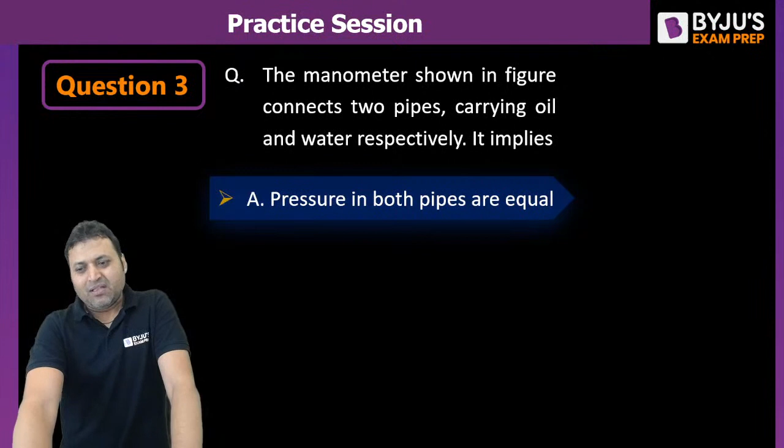Let us move to question number 3. The question is from the manometer. The manometer shown in figure connects two pipes carrying oil and water respectively. It implies: pressure in both pipes are equal, pressure in oil pipe is higher, pressure in water pipe is higher, or insufficient data. There are two pipes, one carrying oil and another carrying water. The figure is on the right hand side of the screen.

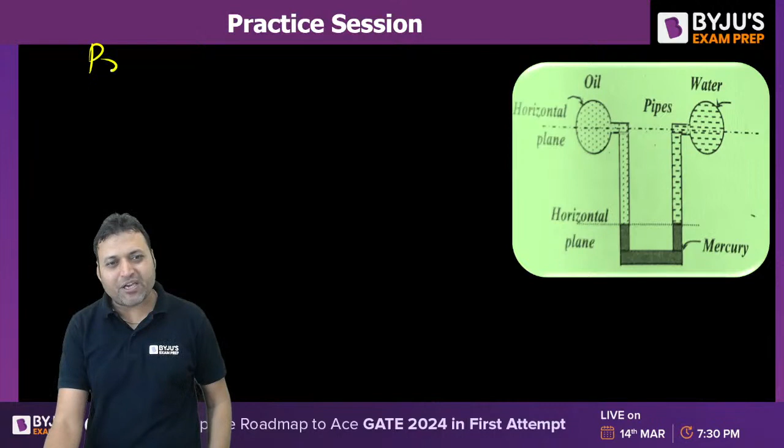What is the problem with manometry? The question looks very simple. We develop confidence, even overconfidence, to attempt questions from manometry. But if your basic concepts are not clear, you might end up with the incorrect answer. Let us write the pressure equation using Pascal's law and the hydrostatic law. Let me call the pressure in the oil pipeline PO, and the pressure in the water pipeline PW.

So if we write the pressure equation starting from PO, this is the datum line. I am using the datum line method. So PO, this point will also be having pressure PO. We are moving in downward direction, plus density of oil into G. Let me assume this height as capital H.

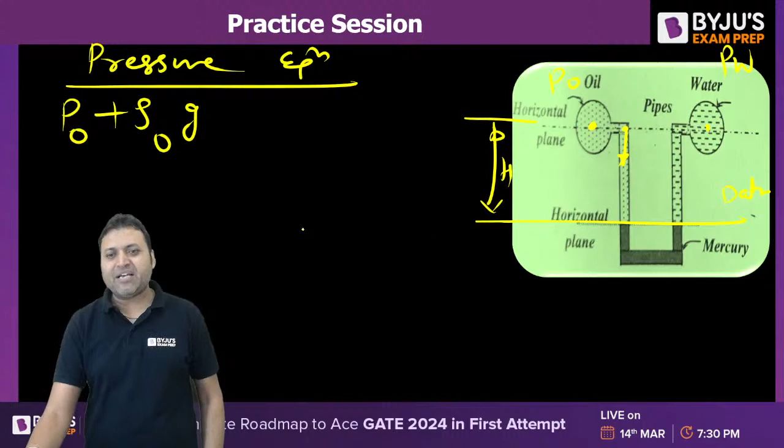This is Px, the pressure at point X, is equal to, starting from the water pipeline, pressure in water pipeline is Pw. We are traveling in downward direction, so pressure increases with depth. Now we are traveling in water pipeline, rho W into G into H. This is Py. Px is equal to Py, isn't it? So we can write PO minus PW is equal to rho W minus rho of oil into G into H, isn't it?

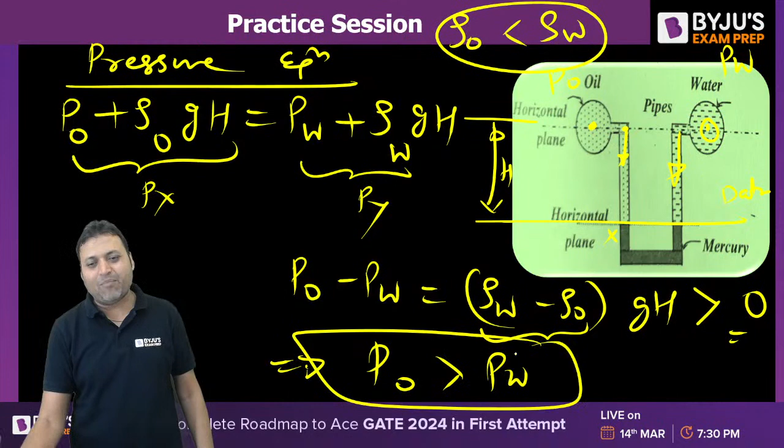And because the density of oil is less than density of water. Water is heavier fluid, having more density. Oil is lighter fluid. That is why oil always floats over water. You must be knowing that. So density of water is greater than density of oil. So can we say that is greater than 0? RHS is greater than 0. What does that mean? That means PO is greater than PW. Oil pipe will have more pressure than water pipe.

What is the answer then? Oil pipe will have more pressure. Pressure in oil pipe will be higher than the pressure in water pipe. Is this clear? So Captain Ajay had given the right answer. I don't see any other student getting me the correct answer. Right? Shall we proceed further to question number 4?

Question number 4. Read the question. If velocity potential function, what is velocity potential function? Phi, exists only for, theoretical question from the kinematics. It exists only for the steady flow. It exists only for the uniform flow. It exists only for the irrotational flow, or it exists only for the compressible flow. Yes, every one of you, please get me your answer.

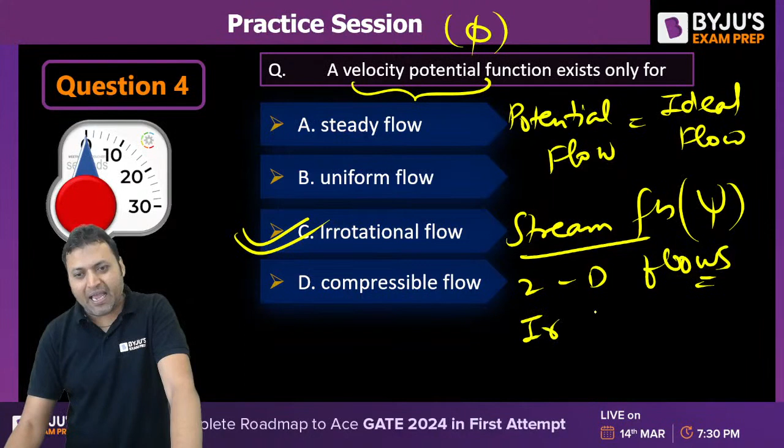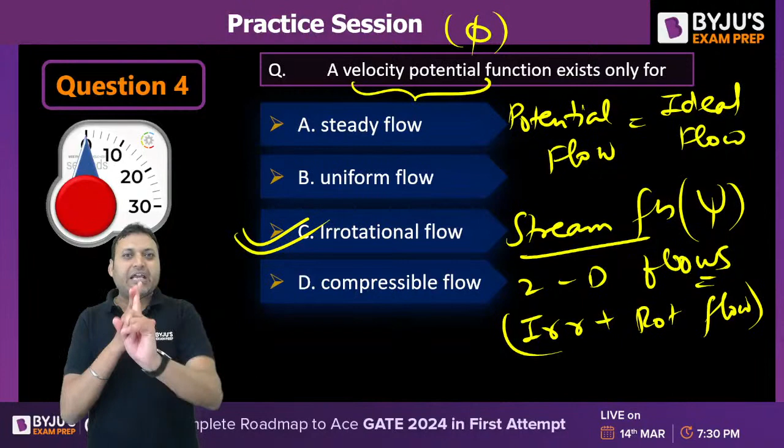And what about the stream function? There are two functions. Stream function exists only for two-dimensional flows. It is valid for irrotational as well as rotational, but the flow must be 2D. For three-dimensional flow, stream function does not exist. That is the limitation of stream function. And similarly, the velocity potential function does not exist for rotational or real flows. All right. So combination of velocity potential function and the stream function is defined for two-dimensional irrotational flow problems in our fluid mechanics. All right. Let us move to the next one.

Question number 5 on your screen. Numerical from the internal flow, laminar flow in a pipe. Formula based. Laminar developed flow, that means fully developed flow, at an average velocity of 5 meters per second occurs in a pipe of 10 centimeter radius. The velocity at 5 centimeter radius is? The options are 7.5, 10, 2.5 or 5 meter per second. Read the question carefully, apply the concept correctly, do the calculation in the right manner and get me your answer.

Yes, practice is what is important in getting your fundamentals correct or getting your concepts clear. So the more you practice, the more improvement in your fundamentals you develop. So always keep on practicing. It is not about revising the theory again and again. Keep practicing and keep checking your analysis. How many questions you have correctly attempted? How many questions you have wrongly attempted? So accordingly, you can focus on those areas where you are having difficulty in getting the answers right. What is the answer?

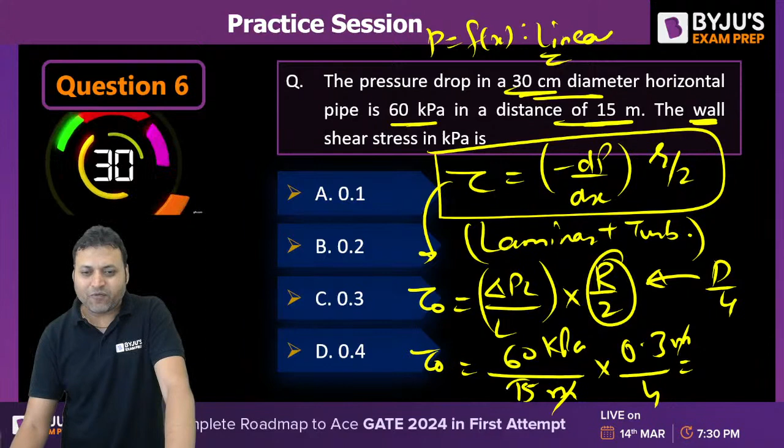That will give you the answer in kilopascal because 60 is in kilopascal. This is in meter. This is also in meter. Take care of the unit, meter getting cancelled out. So 15 into 4 is 60, 60 getting cancelled out, 0.3 kilopascal. Option C is the right answer, isn't it? Yes, Kiran, Roshan, Captain Ajay, well done guys, keep it up.

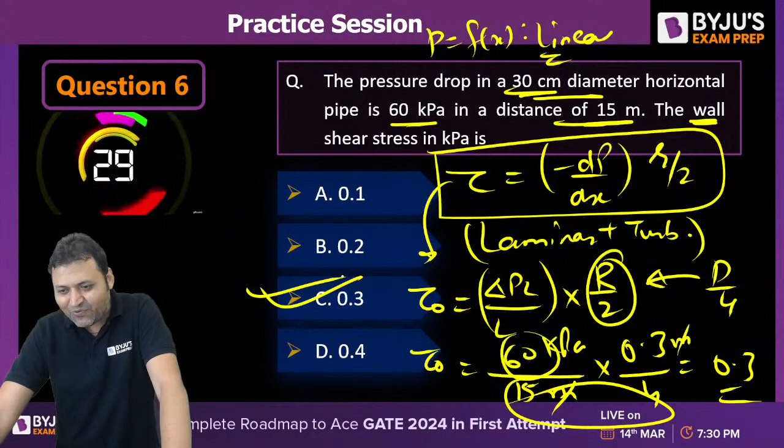Question number 7. Let us move to question number 7 quickly. The question is from the external flow or the boundary layer theory. The thickness of a laminar boundary layer on a thin plate is 2 centimeter at the half of the plate length, X is equal to L by 2. What is the thickness of boundary layer at the trailing edge of the plate? That is at X is equal to L.

Options are 4.71, 4.414, 1.414, and option D is 2.828. Yes. Solve this one. Question number 7.

So whenever there is a fluid flowing over a flat plate, the boundary layer developed will be having an increasing nature. The boundary layer keeps on growing from the leading edge to the trailing edge. This is x is equal to 0, the leading edge of the plate, and this is the trailing edge. This is the direction of flow. At x is equal to L by 2...

Boundary layer thickness is 2 centimeter. What is the thickness of boundary layer at x is equal to L?

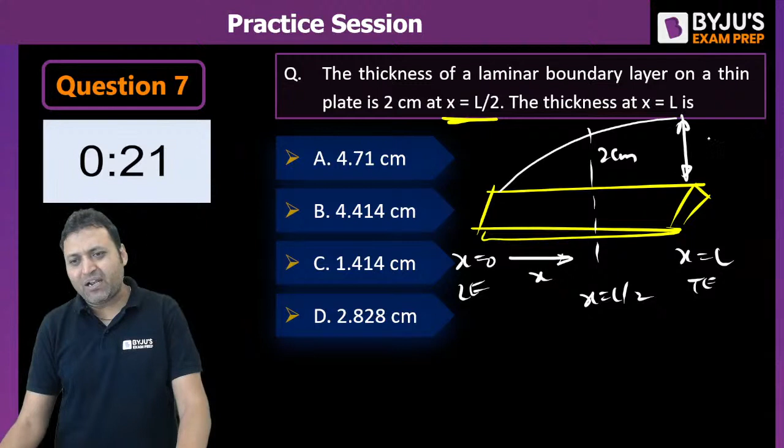Because it is laminar boundary layer, when the Reynolds number is less than 5 into 10 to the power 5, the boundary layer will be laminar. So for laminar boundary layer, delta is directly proportional to root x. The growth of boundary layer in laminar flow is such that delta is directly proportional to root x. For turbulent, delta is proportional to x to the power 4 by 5. But because it is laminar, so root x.

So delta 2 upon delta 1 is equal to under root of x2, that is L upon L by 2. So it will be root 2. So delta 2 will be root 2 times of delta 1. So 2 root 2 will be the answer, that is 2 root 2 centimeter. Root 2 is 1.414 multiplied by 2 is 2.828. Option D will be the answer.

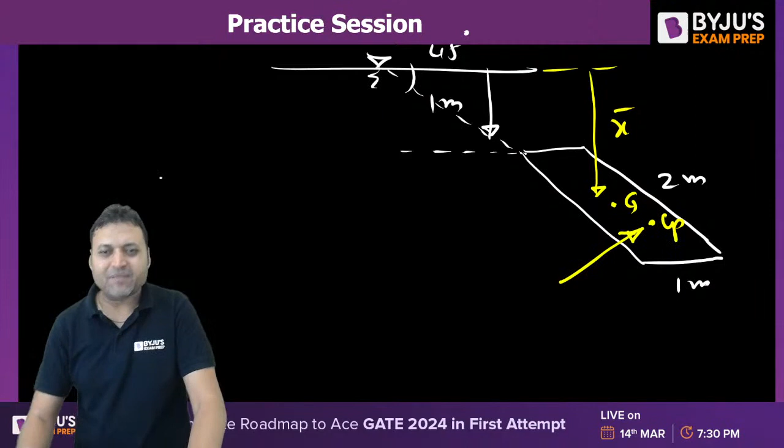Can you solve it? This is the centroid G. So we need to find out X bar, because the formula says the force will be acting like this, at Cp. So the hydrostatic force is rho of fluid into G into A into X bar.

Rho fluid is, so the answer should be in kgf. 1 kgf is the unit of force. Force can have the unit kgf. 1 kgf is equal to G Newton, so you should convert Newton into kgf. G Newton is equal to 1 kgf. So we can write it as 1000 into G into area 2 into 1.

What is X bar? If you find it correctly, this is 1 plus this will also be 1, but this will be 1 sine 45 — is it sine 45 or cos 45? So X bar will be equal to 1 plus 1 by root 2. And 1 by root 2 is 0.707. So X bar will be equal to 1 plus 0.707.

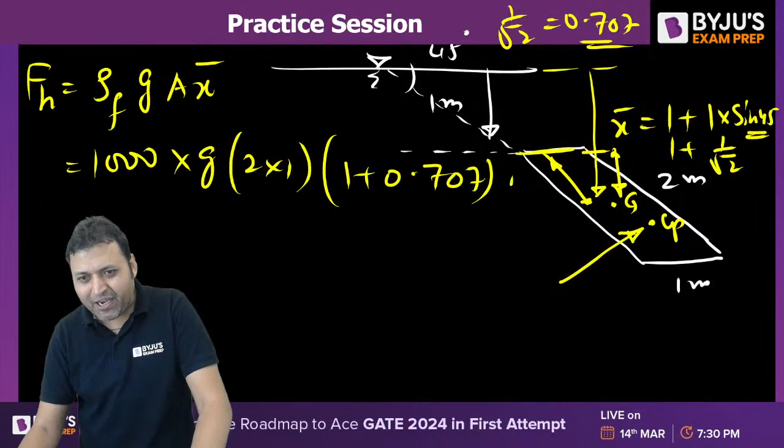That will be in Newton, so convert it into kgf. G Newton is equal to 1 kgf. So it will be 2000 into 1.707 kgf, that will be the answer. 2000 into 1.707 kgf, so it will be around 3414.2 kgf. It is not kilogram actually.

So sometimes, to confuse you, they ask the answer in kg. So 3420, the nearest option is in question number 9. The nearest option is option D. D will be treated correct. Question number 9, right? Any doubt?

So it is all about X bar. If you are able to find out the X bar, you can also find out the depth of CP, HCP. What is HCP? HCP is equal to X bar plus IG by A X bar, sine square 45. You can find out the depth of CP from the free surface using this formula. But the question is not about the depth of CP.

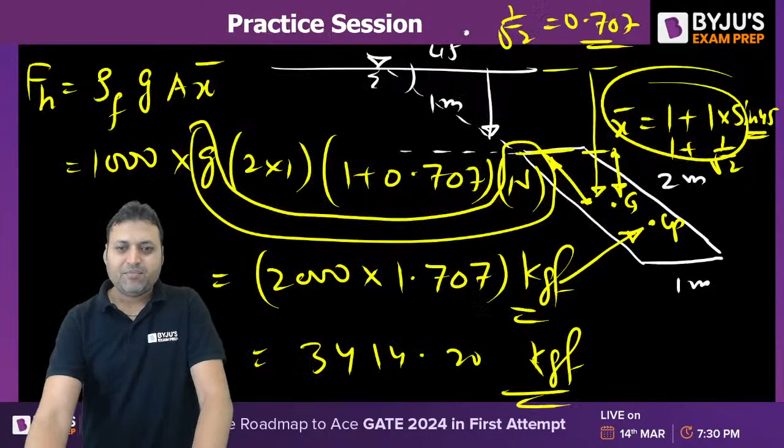Let us move to question number 10. Question number 10 is from Pascal's law. Very simple question: a hydraulic press has a ram of 15 centimeter diameter and a plunger of 1.5 centimeter diameter. It is required to lift a mass of 1000 kg. The force required on the plunger is nearly equal to: options are 100 Newton, 1000 Newton, 10,000 Newton, or only 10 Newton.

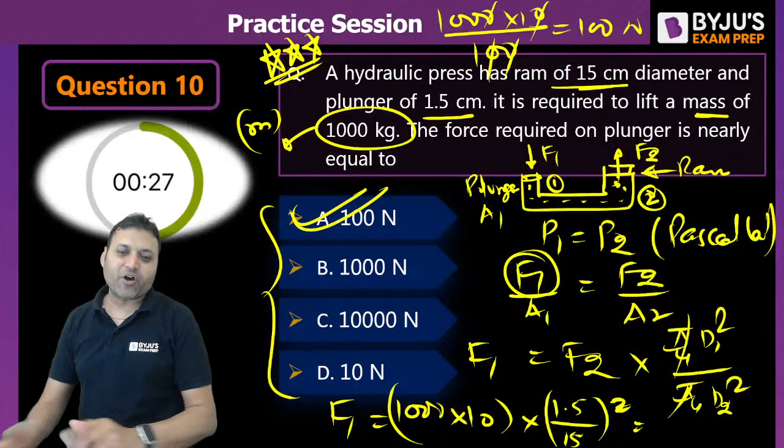Option A, A will be the correct answer, not C. C galat hai, A will be the right answer for this one. 100 Newton will be the right answer, isn't it?

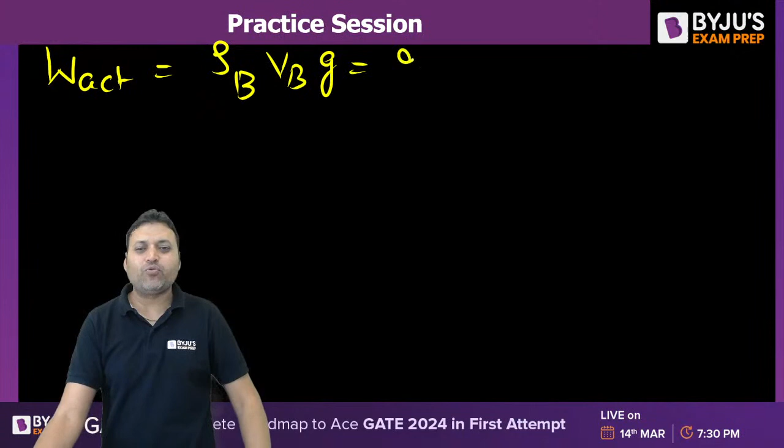The actual weight is equal to rho of the ball into total volume of the ball into g, equal to 9 kilonewton. That is equation number 1. The second equation says the weight is 9 kilonewton, but there is a buoyant force by the fluid. So the apparent weight, 9 minus buoyant force by the fluid, is equal to 7.5 kilonewton, isn't it? So the buoyant force by the fluid is equal to 9 minus 7.5.

So the buoyant force by the unknown fluid, which is density of unknown fluid into volume of the ball, because it is completely submerged, into g, is equal to 9 minus 7.5, that is equal to 1.5 kilonewton. The buoyant force is 1.5 kilonewton. This is equation number 1, this is equation number 2.

If you divide these two equations, then VB gets cancelled out, g g gets cancelled out. So density of the ball is equal to 9 upon 1.5 into density of the fluid, right? If you divide the whole expression by density of water, this will be specific gravity of the ball equal to 9 upon 1.5 into specific gravity of the unknown fluid.

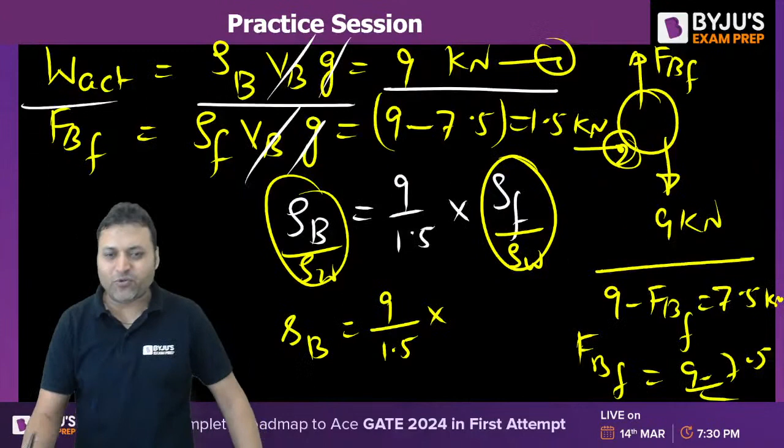And what is the specific gravity of unknown fluid? That is 0.75. What is the answer? 6 into 0.75, 6 into 0.75, 4.5 is the specific gravity of the unknown fluid, 4.5. The answer will be 4.5. C is the correct answer.

4.5. Is this clear? Yes, free fire. Well done, keep it up. Good, good. Captain Ajay, Parth. Very nice.

11, question number option is C. Very nice. Let us move to question number 12.

This is the last question from the fluid mechanics. Then some questions will be there, 8 questions will be there from the heat transfer.

Assume that the viscosity of water is 1 centistoke. Which viscosity is it? Kinematic viscosity, at room temperature. Then the maximum permissible pipe diameter for maintaining the laminar flow in a pipe with a velocity of 1 meter per second is to be found. You need to find out the maximum diameter for which the flow in the pipe is still laminar. Options are 12.5 mm, 6.75 mm, 4 mm, or 2 mm.

These are the options.

Can you solve it? Question number 12, the last one from the fluid mechanics. Then there will be questions from the heat transfer. Knowledge is of no value unless you put it into practice.

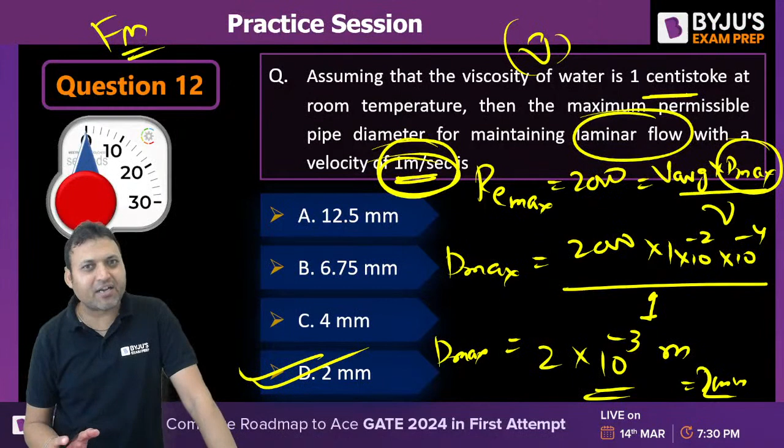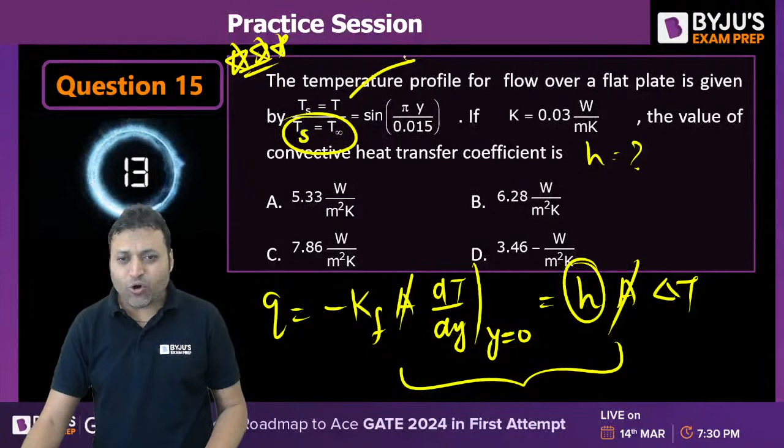H is equal to minus kf into dT by dy at y is equal to 0 upon delta T. Delta T ये रहा, Ts minus T infinity is delta T. इसको अगर मैं dT by dy at y is equal to 0 कैलकुलेट करूं तो that will be delta T into sin का differentiation cos, y की value 0 put करनी है, cos of 0 into pi upon 0.015. ये dT by dy.

So it will be negative here. dT by dy will be negative. So thermal conductivity will be 0.03. 0.03 into cos 0 is 1, into pi upon 0.015, upon delta T.

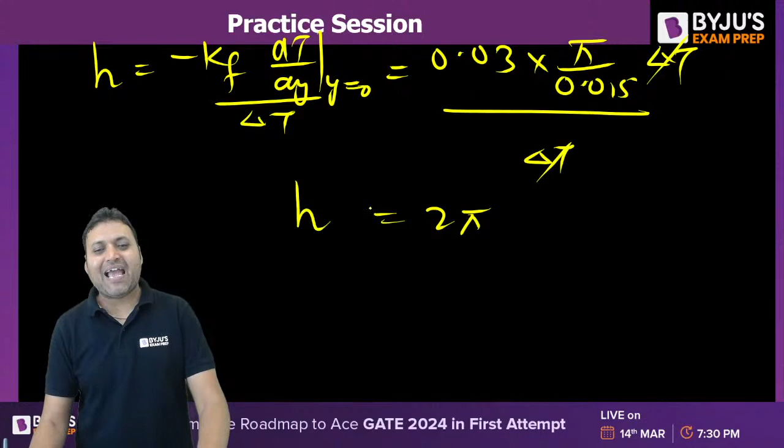The answer H will be 2 pi. So 2 into 3.14, 6.28 watt per meter square Kelvin, isn't it? 6.28. B. Question number 15 option B is the right answer. Right? Let us move to question number 16. Question number 16 very simple.

ये थोड़ा straight line है. It is a straight line. It is a curve like this, it is a curve like this, or it is a parabola like this. The thermal conductivity of a plane wall varies with this variation: K is equal to K naught into 1 plus beta T. Which of the following is the temperature profile if beta is greater than 0? Question number 16.

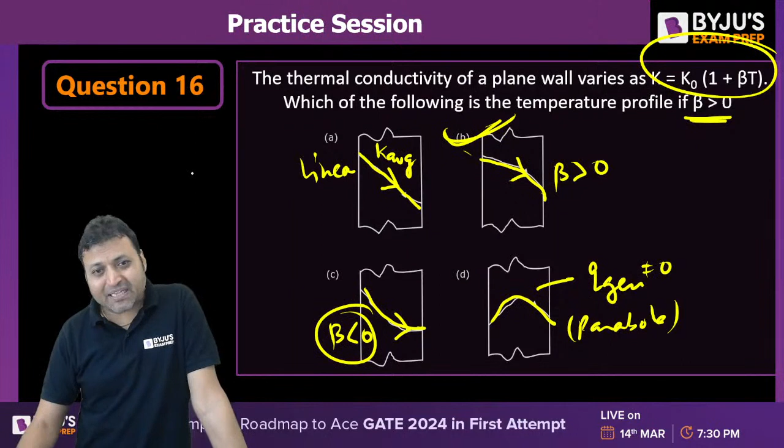Q is constant, Q is equal to minus KA into dT by dx is constant. So we can say dT by dx is inversely proportional to K.

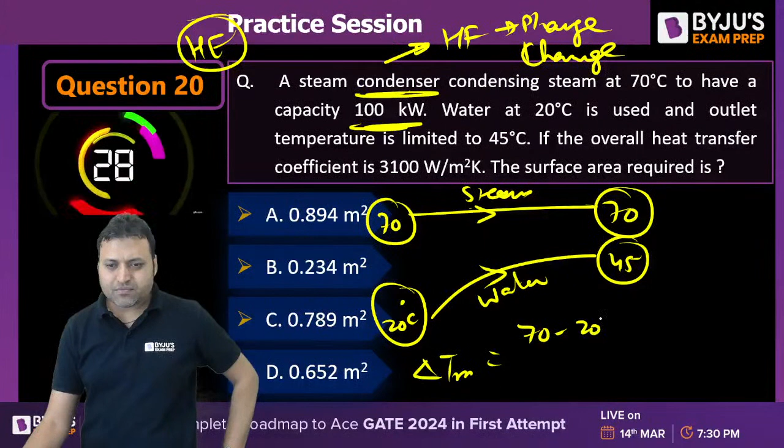All right. Question number 20. What is the answer? If I draw the temperature profile, this is steam. This is 70 degrees Celsius. This is also 70 degrees Celsius. Water is moving from 20 to 45. If we calculate delta TM, LMTD for this heat exchanger, that is 70 minus 20 minus 70 minus 45 upon natural log of 70 minus 20 upon 70 minus 45.

What is LMTD? Delta TM is 50 minus 25 upon natural log of 50 by 25. 25 upon ln of 2. What is ln of 2? Do you know? 0.693. So it is 25 upon 0.693. That is delta T. And Q is equal to U into A into mean temperature difference.

Q, that is 100 kilowatt, so 100 into 10 to the power 3, equals U into area into delta TM. Area is actually to be calculated. U is 3100, into the area which is unknown, into delta TM, which is 36.06. That will give you the area in meter square. Can you solve it?

Can you find out the answer for question number 20? Are you guys getting 0.894 or not? 0.894. Option A will be the correct answer for this one.

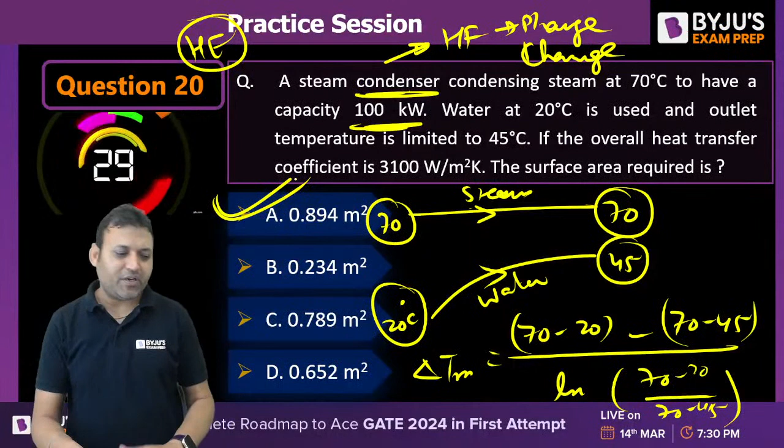So guys, that is all from my side. I hope you enjoyed the session and you have improved your fundamentals and were able to apply those concepts in the numericals. The portion which is difficult for you, or for which you were not able to get the right answer, please do revise, practice more and more questions, and you can always connect with me through the mail ID, and please do join me on the Telegram group as well.